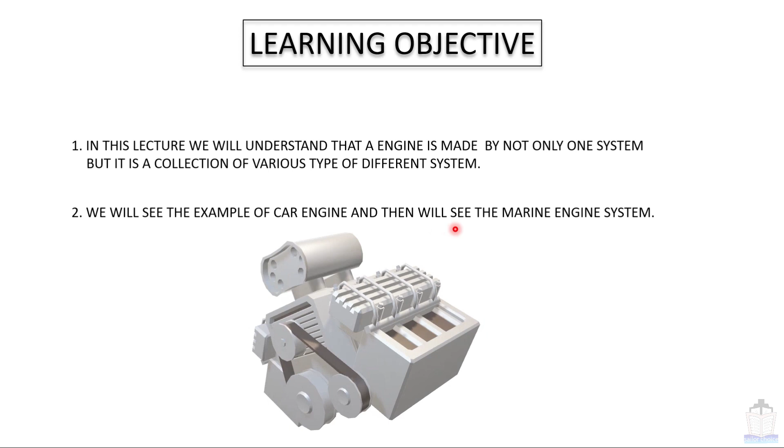Learning objective: In this lecture, we will understand that an engine is made not by only one system, but is a collection of various different systems. We will see the example of a car engine and then the marine engine system.

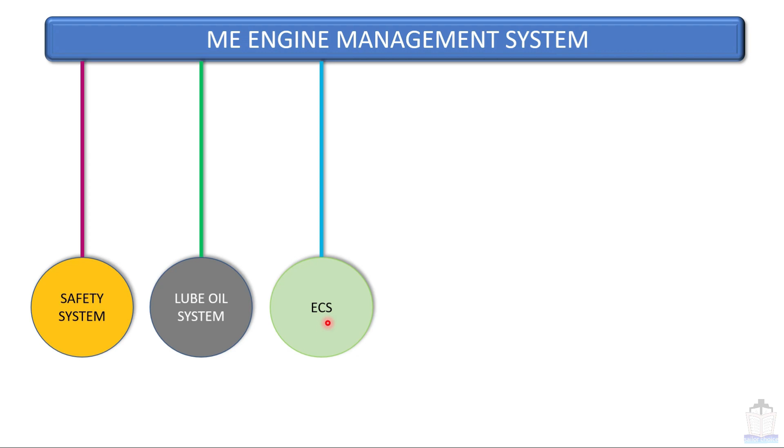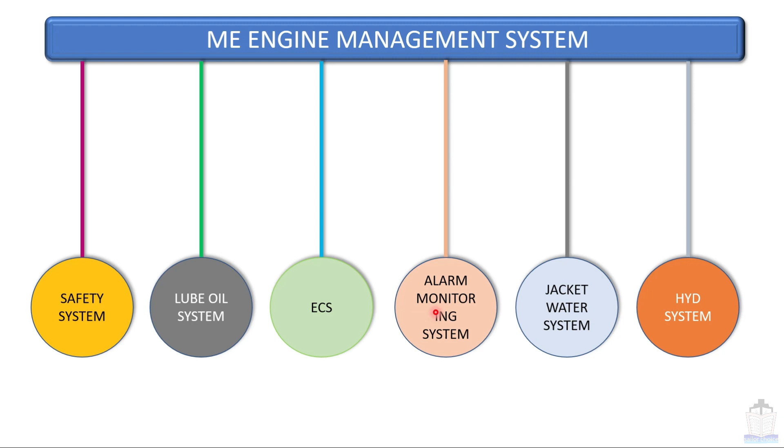Now we are going to discuss the ME engine management system. As I told you, the ME engine is made up of various other systems as well. My intention here is to show you what other types of systems are there in the ME engine: safety system, lube oil system, ECS (engine control system), alarm and monitoring system, jacket water system, hydraulic system. These are a few examples. Some more systems are also there, which belong to EICU, ECU, CCU, about which I already discussed in class number 7. Among all these systems, the main one is this engine control system.

This is also considered to be the brain of the engine. This ECS has a lot of influence over other systems as well. For example, it controls the jacket water system through the CWCU, the hydraulic system through the ACU, and the lube oil system too. Although they are different systems altogether, some part of each is being controlled by the engine control system.

Now, the next important system is the safety system, and it also has influence over the engine control system. That means when it generates a slow down and shutdown signal, it directly gives it to the engine control system, and the engine control system finally executes the order.

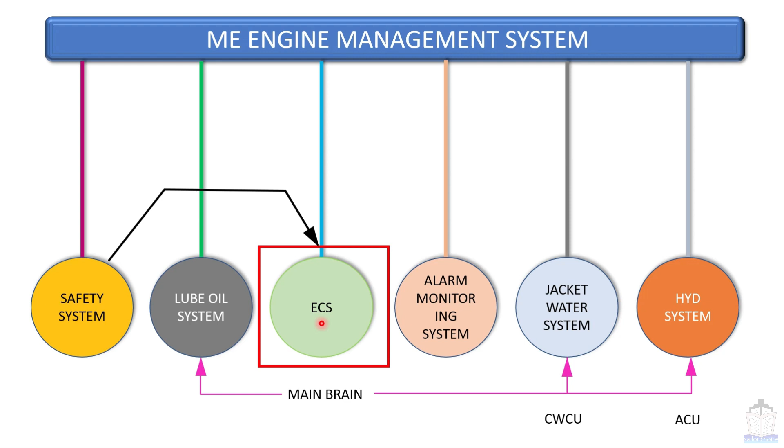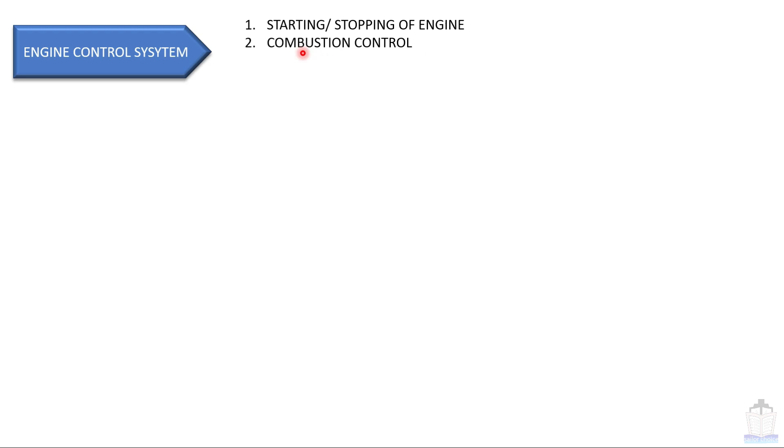Now we are going to see the function of some important systems. First is the engine control system. Major jobs are starting and stopping of the engine, combustion control, exhaust valve open close, RPM control, and lubrication.

Next, engine safety system: it monitors all critical parameters of the engine and generates shutdown and slow down signals. Remote system: it facilitates remote operation and maneuvering of the engine.

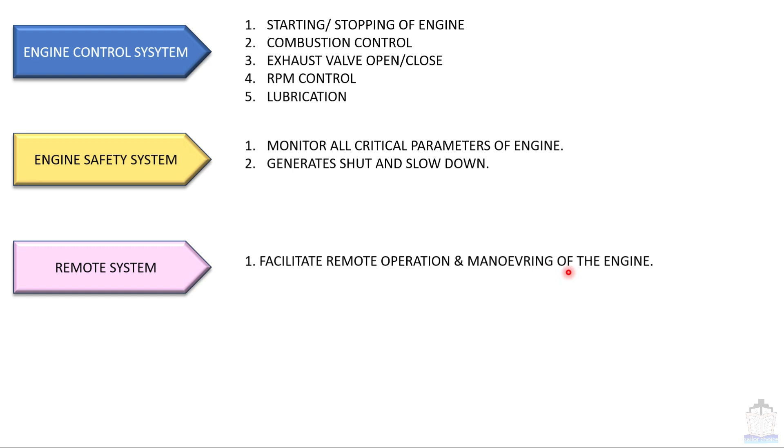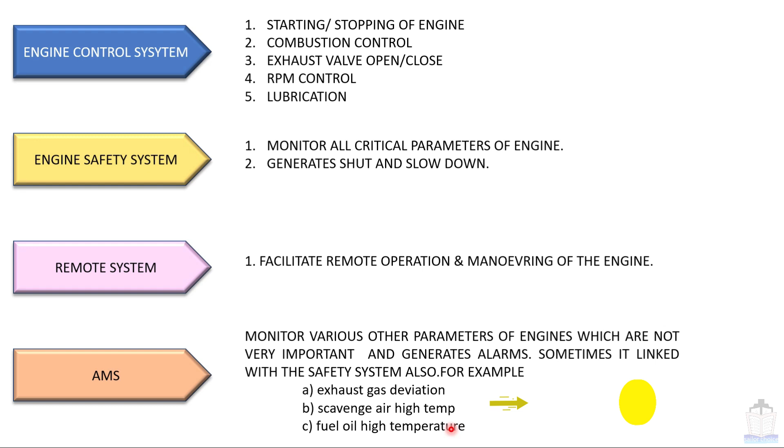AMS monitors various other parameters of the engine which are not very important, and generates alarms. Sometimes it is linked with the safety system also, for example exhaust gas deviation, scavenge air high temperature, fuel oil high temperature. That means sometimes these alarms also go to the safety system, and the safety system takes action accordingly.

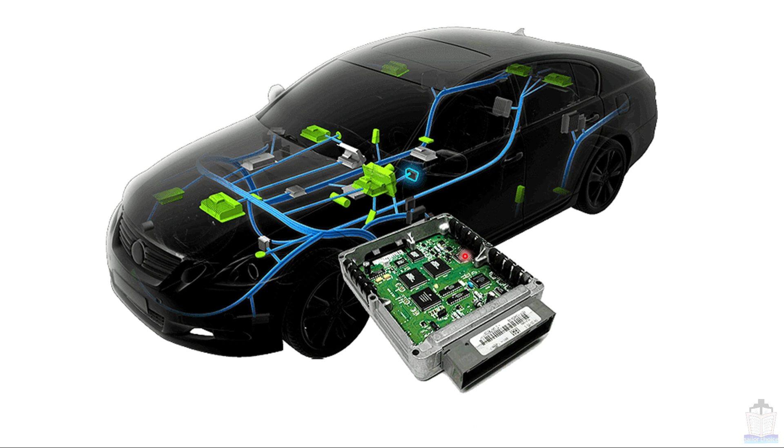Now we are going to discuss the car engine system. Here you can see this is a motherboard, called the engine control module, in short ECM, also named the engine control unit, ECU. This unit is a part of the engine control system. Now we are going to see it in detail.

This is called the engine control unit, and basically this unit is the brain part of the car, and if this gets damaged, the car cannot be started. Now we are going to elaborate on the same thing in a different way.

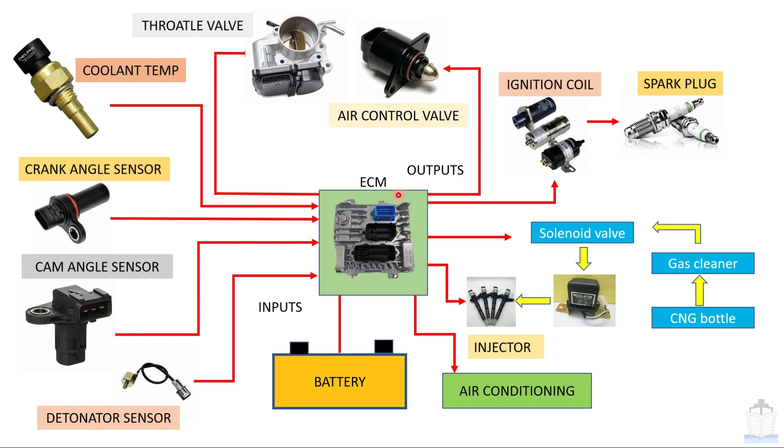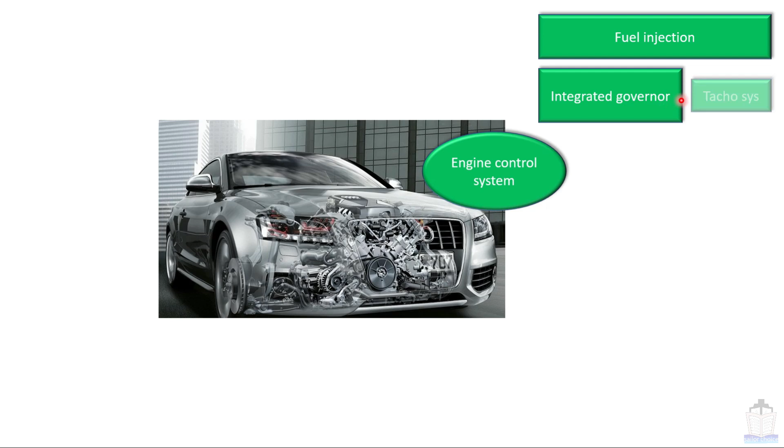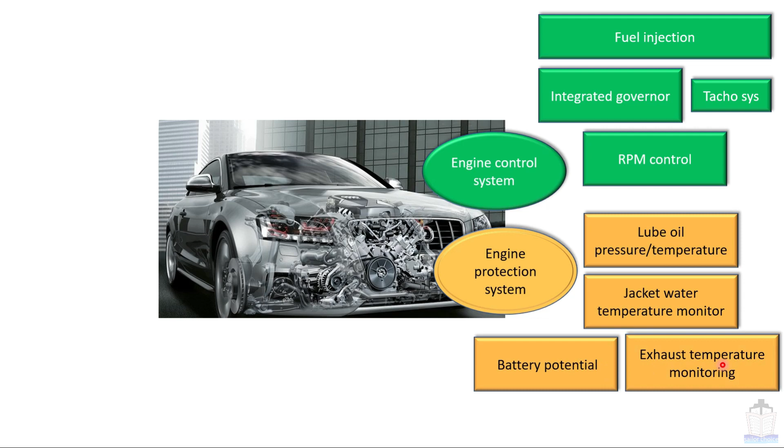For example, this is a car, and this car has an engine control system which includes fuel injection, integrated governor, tacho system, RPM control. Next is engine protection system: lube oil pressure and temperature monitoring, jacket water temperature monitoring, battery potential, exhaust temperature monitoring, check engine warning, and some additional monitoring, for example high speed, handbrake engaged, door open, etc.

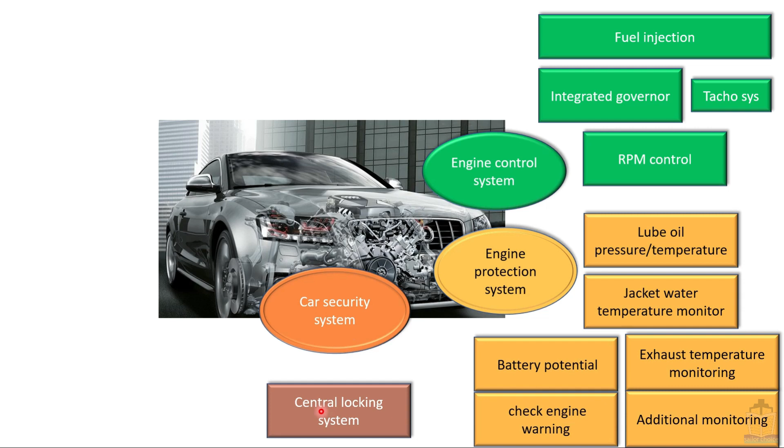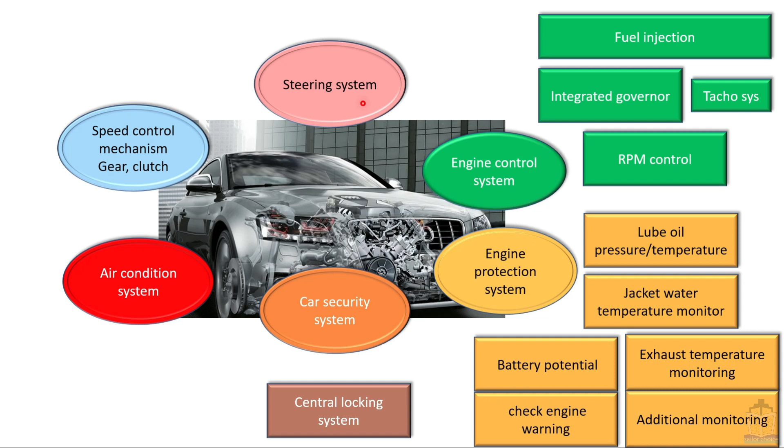Other systems are the car security system, called the central locking system. Another one is the air condition system. Next is the speed control mechanism that includes the gear, clutch, accelerator, etc., controlled by the person itself. Next is the steering system, also controlled by the person. And last, some electrical wiring is there for lighting and horn. So all these systems combined together make a complete car.

Here my intention was to show you that a car, which has a very small engine, also has various kinds of systems which make a complete car. It is not built up in one single unit, but built up with various different systems. I hope this part is clear. Now next,

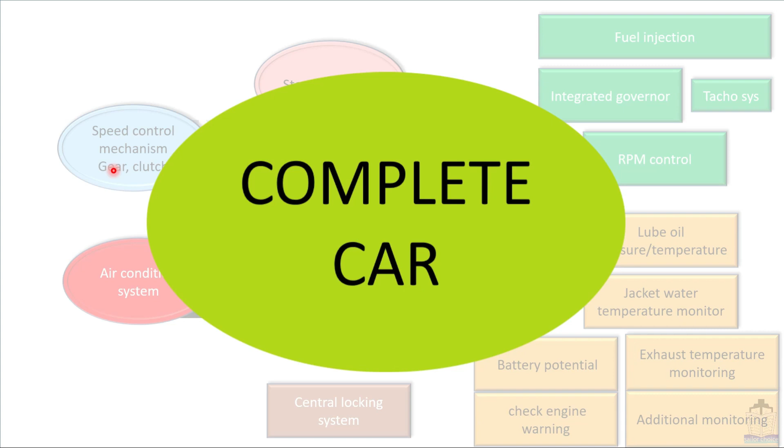let's come to the marine engine. So far we have seen how the car engine system is designed. Now we are going to see about the marine engine. First we will discuss the MC engine.

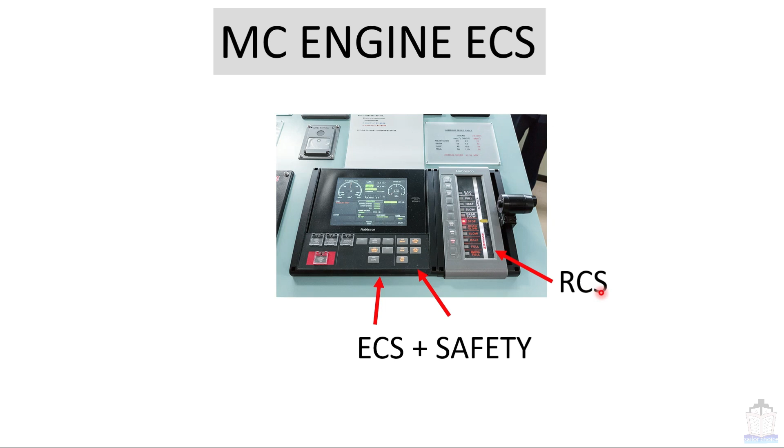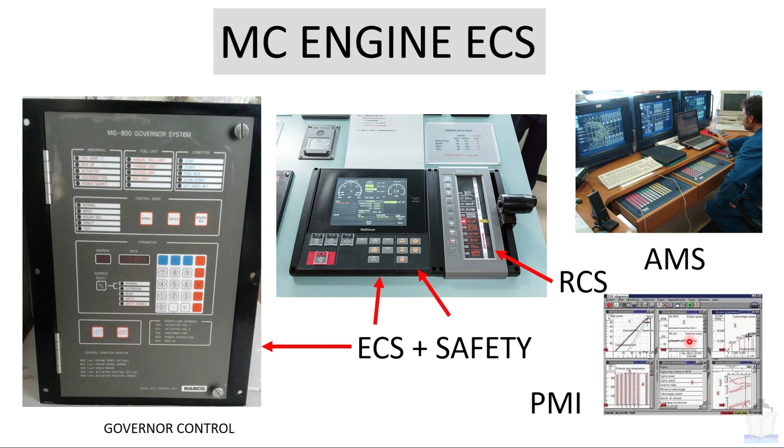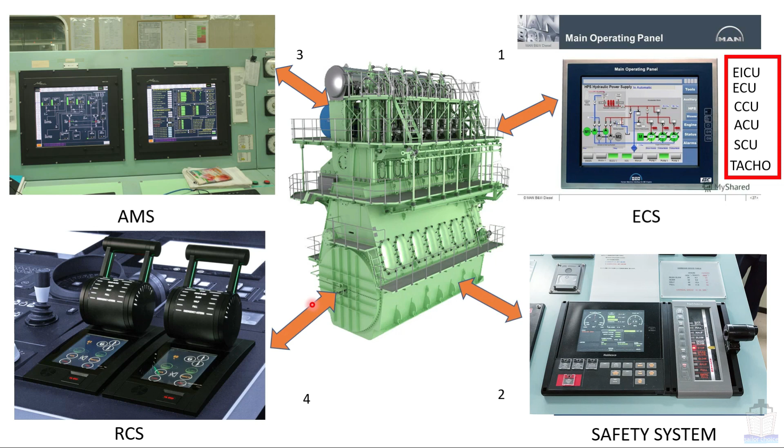Third system is the alarm and monitoring system. And fourth system is the remote control system. Here I have given a few examples. Some more systems are also there, about which we have already discussed several times.

Now look at the same thing in a little more elaborated form. The ME engine contains the engine control system, which includes various MPCs, tacho system, hydraulic system, pneumatic system, slow and shutdown function. This slow and shutdown function is generated by the engine control system, not by the safety system. The safety system's slow and shutdowns are different.

Next is the engine protection system, also called the safety system. This safety system gets input from various sensors, and based on the signal it generates slow and shutdown signals sent to the engine control system.

Next is the alarm and monitoring system. It also gets input from various types of sensors like fuel temperature, start air pressure, exhaust temperature monitoring, axial vibration, etc. These are not so important as far as the mechanical part of the engine is concerned.

Next is the remote control system. One part is situated at the bridge and another part is situated at the engine room, and the signal is sent to the engine control system. Next system is the PMI system, which

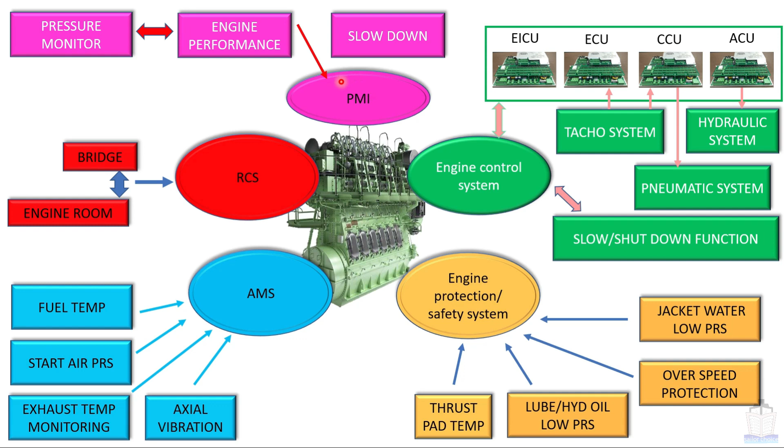basically does the pressure monitoring. It also improves the engine performance. In some engines, the PMI is also responsible for generating the slowdown signal.

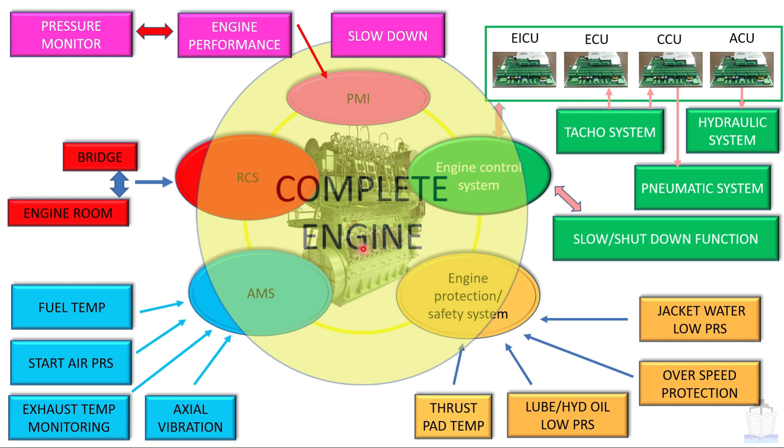Now all these systems combined together make a complete engine. So here, similar to the car engine, we can see that the ME engine is also designed with the help of various other systems, not just one system. Please note, in terms of AMS, there isn't much change between the MC engine and ME engine. All alarm handling is almost the same.

We have comprehended finally that the engine is built up with the help of various types of systems. Every system has its own function. All systems work together for the entire engine and make it complete. So that was all about the engine system. I am winding up here only.